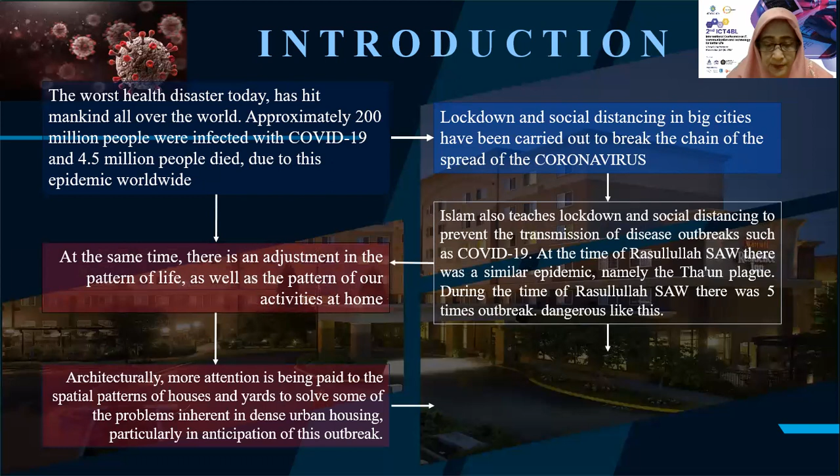At the same time, there is an adjustment in the pattern of life and our activities at home. Architecturally, more attention is being paid to the spatial pattern of houses and yards to solve some of the problems inherent in dense urban housing, particularly in anticipation of this outbreak.

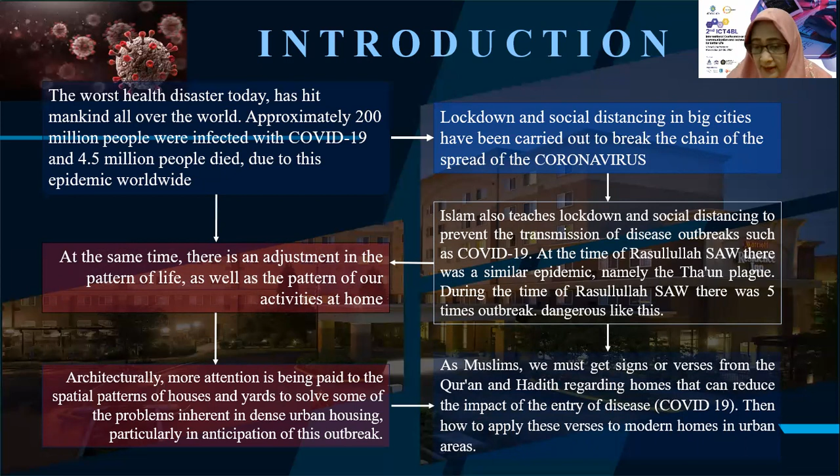As Muslims, we must get signs or verses from the Quran and Hadith regarding homes that can reduce the impact of the entry of disease like COVID-19. Then, how to apply these verses to modern homes in urban areas.

The problem is, what is the concept of Islamic houses that is anticipatory to disease? And how do we transform the concept of Islamic houses into modern homes that are anticipatory to COVID-19?

Research purpose: to get a conception of Islamic living space which is anticipatory to disease outbreak, and to get a modern outdoor layout design concept that is anticipatory to coronavirus based on Islamic concept.

Research method: based on the current condition in the form of the large-scale social restriction in Jakarta affected by the COVID-19 outbreak, this research cannot conduct a survey, so it uses a descriptive research method with a qualitative approach.

Location data was taken based on interviews with home owners, and photos and videos of residential conditions. The analysis uses a comparative descriptive method and literature review, describing factual conditions by presenting facts in the field and comparing them between one condition and another.

Requirements to break the chain of COVID-19 in residential houses.

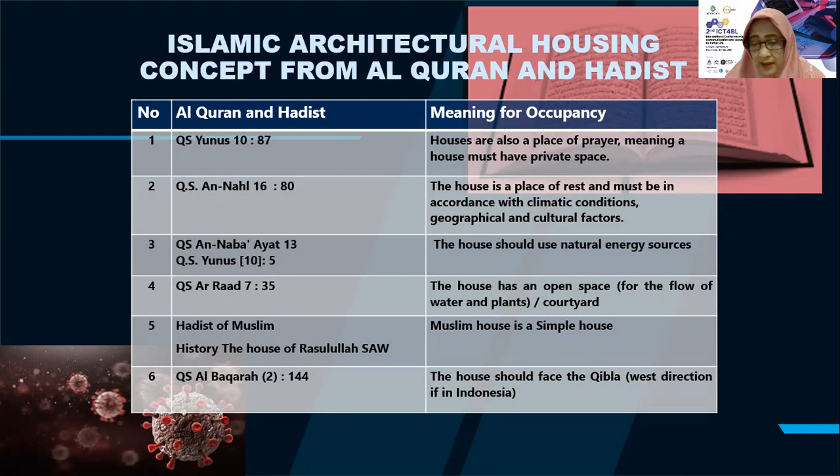Hadith of Muslim history: the house of Rasulullah SAW was a simple house. Surah Al-Baqarah 144: the house should face the Qibla, which is the west direction in Indonesia.

Islamic architectural and modern house concept. First, traditionally, the Islamic house has always been said to be a courtyard-type dwelling. The design has a cosmic meaning as an archetype in the Arab Muslim environment.

The yard house has a value recognized as a type of dwelling that incorporates nature into the house without sacrificing personal life. Second, this concept is in line with the concept of housing based on the Quran and Hadith, except that the house must be small and simple.

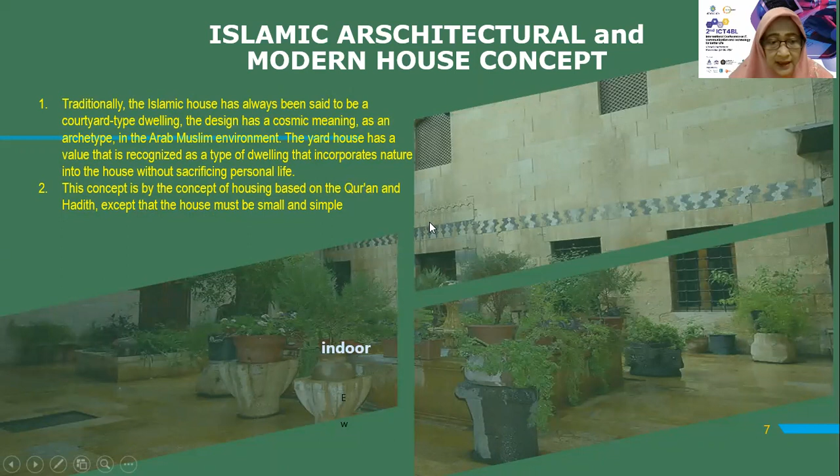For example, the Islamic house is a plan of a typical traditional Islamic courtyard house of Tunisia. In space organization, the house is oriented in the right direction, facing west.

They have outdoor space, then public area, semi-public, courtyard, and private area. In the conception, the interior space consists of private spaces, courtyard, semi-public, and public spaces. Private space is limited by public and semi-public spaces, and the courtyard serves as breathing space.

Map layout: this is the outdoor, transition space, and indoor space.

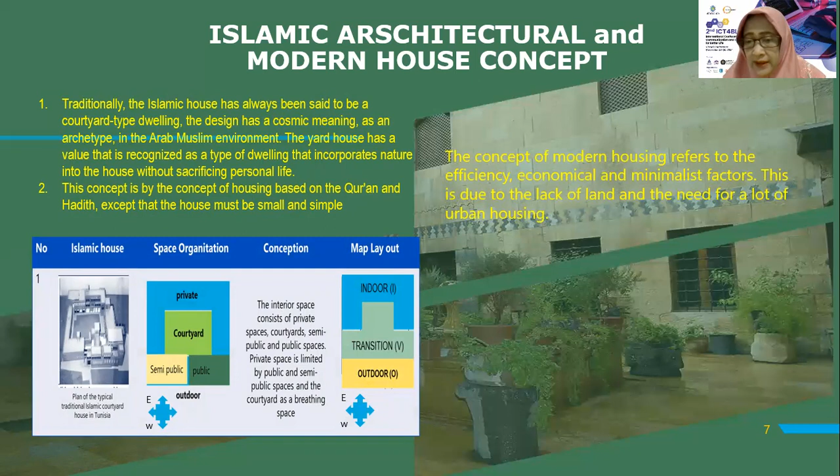In the modern house, the concept of modern housing refers to efficiency, economy, and minimalist factors. This is due to the lack of land and the high demand for urban housing.

This is a layout for modern residence space. Space organization is outdoor, then public area, yard, and then private area.

In this conception, the inner space is directly accessible without going through an intermediary space, because the space is very small. Map layout: outdoor, transition space, and interior space.

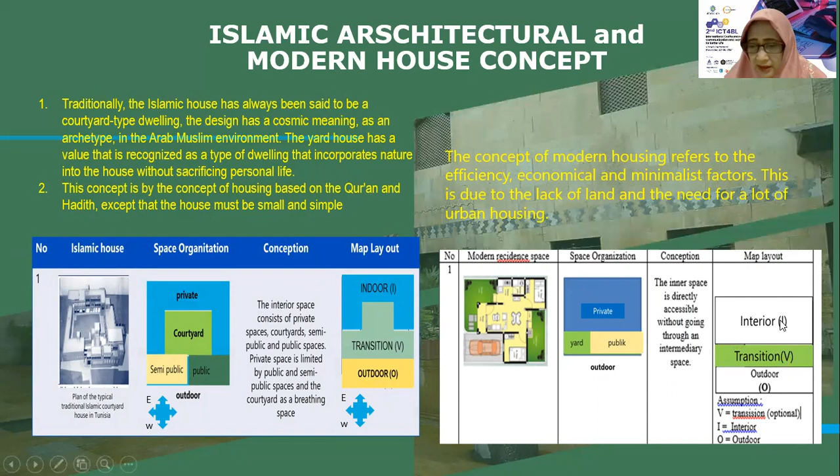Findings and discussion. Ray Oldenburg, 1991, in the book The Great Good Place, describes three worlds or realms that exist in human life, which he called the first place, second place, and third place.

Transitional space as an open space is needed; however, urban housing conditions often do not have adequate land. Following this conception, below is an analysis of the relationship between the concept of urban residential spatial planning

based on Islamic conception in the pandemic era. Based on the concept of the Islamic house, for a modern house the main building faces west for Indonesia, and there are three main zones: indoor, transition, and outdoor.

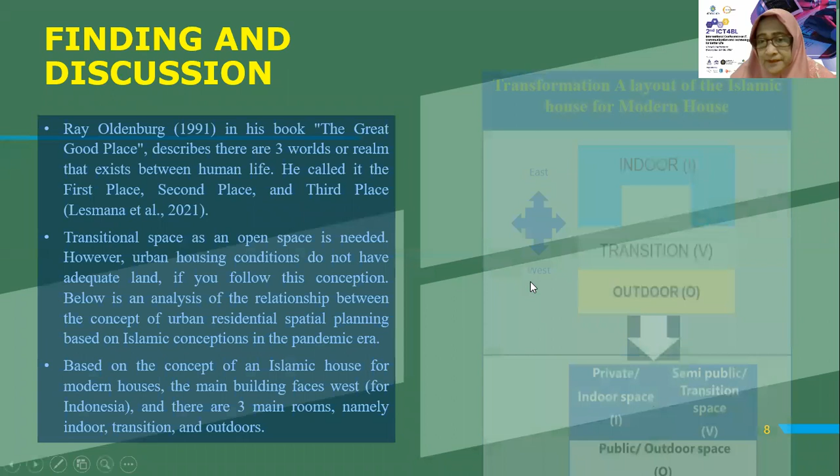This is a transformation layout of the Islamic house for a modern house.

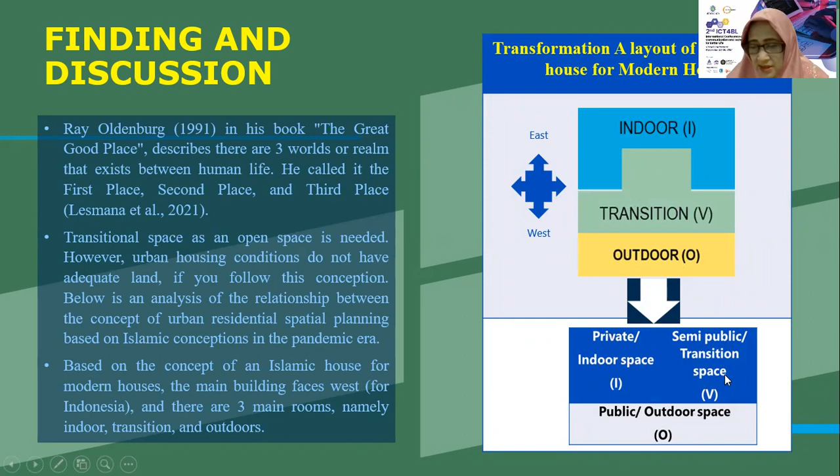Islamic house layout is outdoor, transition, and indoor. Then we find the transformation for modern housing is public area, outdoor space, and private area. So public or outdoor space, then semi-public or transition space, and then private or indoor space.

Discussion: the housing analysis here is by the Islamic residential concept with criteria, among others, the main door facing west, the size of the layout of the minimalist plan, the use of lighting and natural ventilation, and the setting being in the middle of the city.

Type A, urban kampung dwelling. Residential in the middle of the village with maximum density, with characteristics according to the Islamic concept: an area of 100 square meters, main door facing west, there is a transition room, and maximum natural lighting and ventilation during the day.

This is the map. The area is in the west, South Jakarta. This is the facade and house layout. This is the alternative space component.

First, a 2-point washing hand and feet station. We can wash our hands before we come into the house, and at the 2-point we can wash the hands and feet. Due to the small area, maximum cleaning is possible.

Sunlight source: in this area, area 1 and area 2 have sunlight source because this is outdoor, this is indoor, and this is outdoor space.

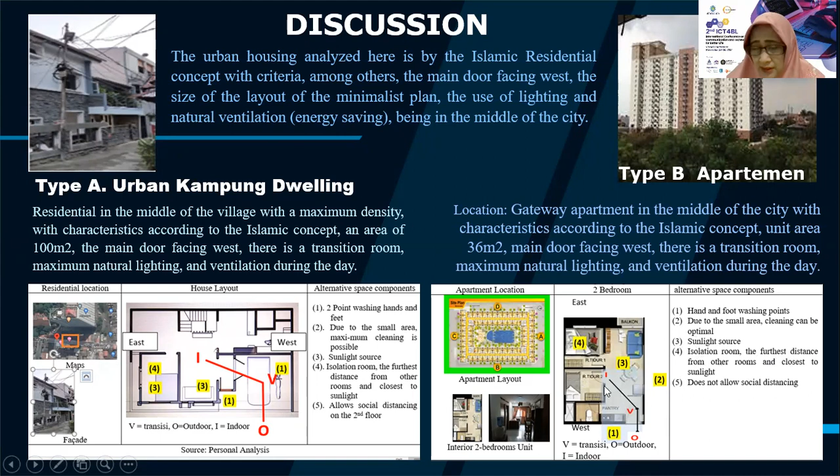This is a balcony. Isolation room: the furthest distance from other rooms and close to sunlight. Number 4 is for the isolation room, but it does not allow social distancing because it's a very small space and everybody can see into this space in the interior.

Analysis layout and anticipatory Islamic city residential space against COVID-19. Relation map, Type A: this point can be at 2 points, at point O and point V.

Room size 100 square meters, efficient enough for frequent cleaning. Maximum natural light, there are several rooms with natural lighting. Isolation of the patient: there is one room with optimal natural lighting and close to access. Social distance: there is a transition space for social distancing.

Type B, apartment, only 1 point at O, a very efficient small unit for cleaning. Maximum natural light, only 1 room. Isolation of the patient: there is 1 room that is not optimal. There is no open transition space for social distancing.

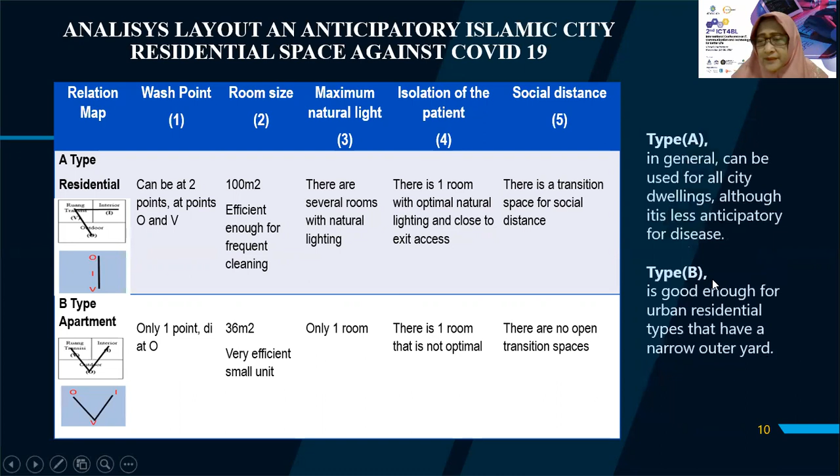So Type A is general, can be used for all city dwellings, although it's less anticipatory for disease. Type B is good enough for urban residential types that have a narrow outer yard.

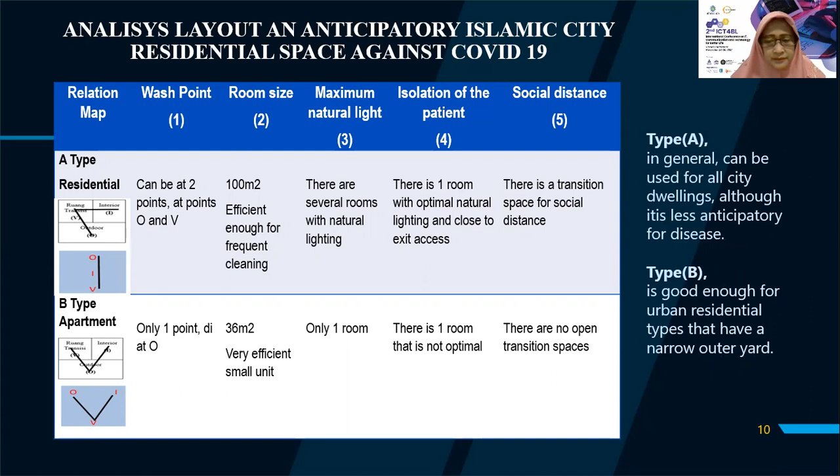Discussion: based on the analysis of the two residences, it can be said that although the apartment units are the most efficient, the layout of the door space integrated with the transition room makes the location for washing hands and feet too forced, and the room that allows anti-epidemic measures is not created optimally, so that single horizontal dwelling still has a better ability to anticipate COVID-19.

One thing that fits the concept of Islamic house in a modern home design is minimalist. This efficient and economical minimalist concept fits perfectly with the Islamic home concept in the COVID-19 pandemic conditions.

Minimalist housing is relatively easy to clean because of its small size, such as low and medium apartment units and houses. A small house makes it easier for air and natural lighting to enter the room and circulate well, so that the house is healthier, especially for the current pandemic condition.

By Surah An-Naba, verse 13, the sun is a lamp that can give light and positive energy to humans. A house with optimal sun can be a good isolation room for people with COVID-19. The result of the study showed that the coronavirus is 3 times more sensitive to UV rays in the sun than influenza A.